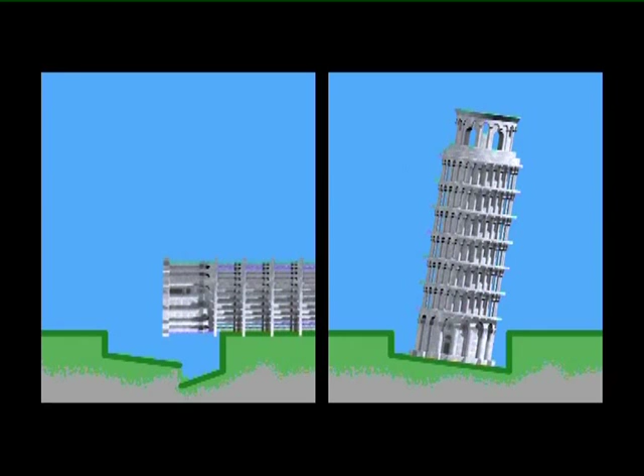The experts immediately realized that the tower was in serious risk of collapsing, partly as a result of the nature of the ground on which it rests, composed of marine and river sediment and therefore highly deformable, and also because of the stress it was subjected to by the lean itself. In addition, even though it was a situation of maximum alert, attention also had to focus on the severe deterioration of the stone surfaces.

By analysing the structure of the tower, the experts discovered there was a very serious risk of breakage at the first level, at the height of the first order of columns, the area most greatly stressed by the lean. The probability of collapse was extremely high, and so it was necessary to act immediately by taking urgent preventive measures. Therefore, an encircling support structure was created to run all the way round the first order.

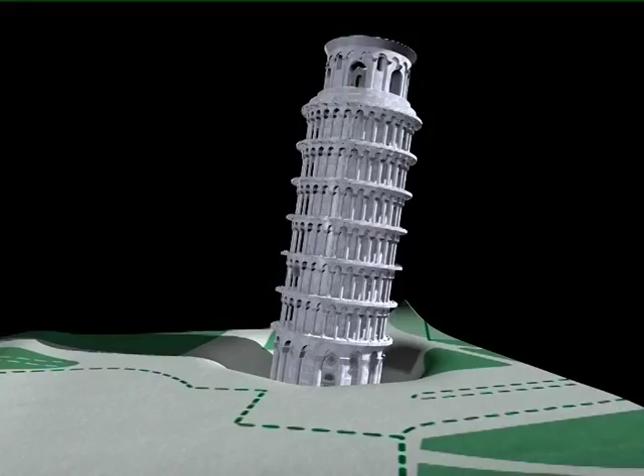Several steel cables with a 15mm diameter, insulated by a special sheath in order to protect the marble, were positioned around the first order, so as to counteract the widening of the cracks and ensure that the masonry remained compact. At the same time, the committee undertook temporary works aiming to prevent the lean from continuing to increase. So in 1993, a series of weights were applied north of the monument to counterbalance the lean.

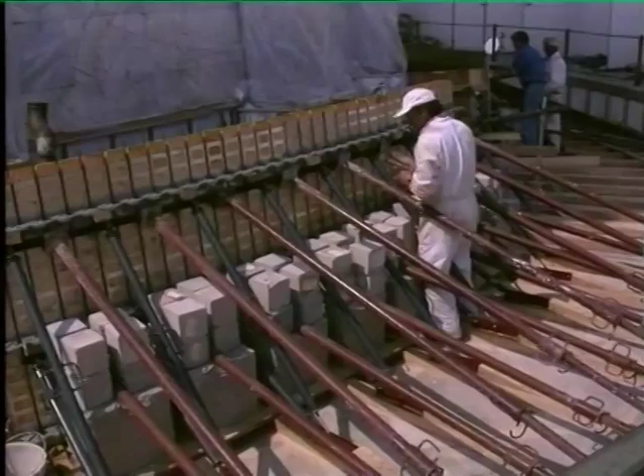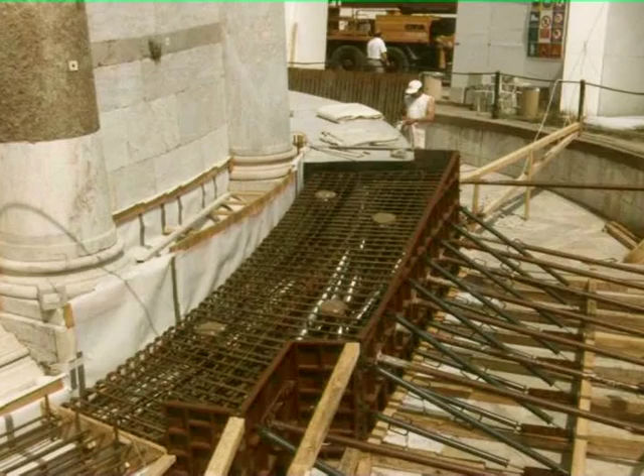On the northern part of the basin, a circular beam was constructed to support the weights. The girder, made of pre-stressed reinforced concrete, was carefully separated from the marble walls of the tower by means of several layers of insulating material. Work on setting the girder and the supports in place was carried out between July 1993 and February 1994.

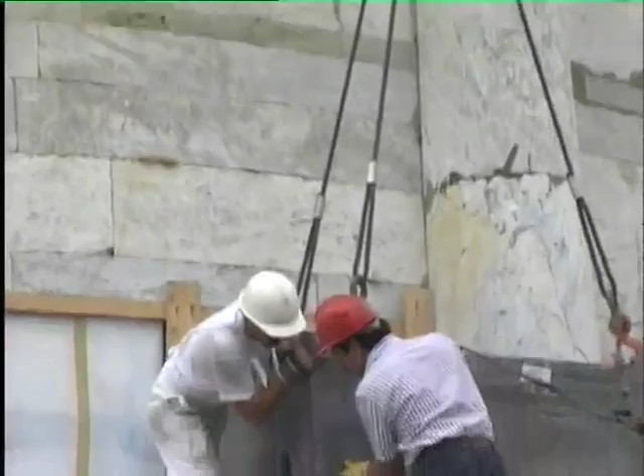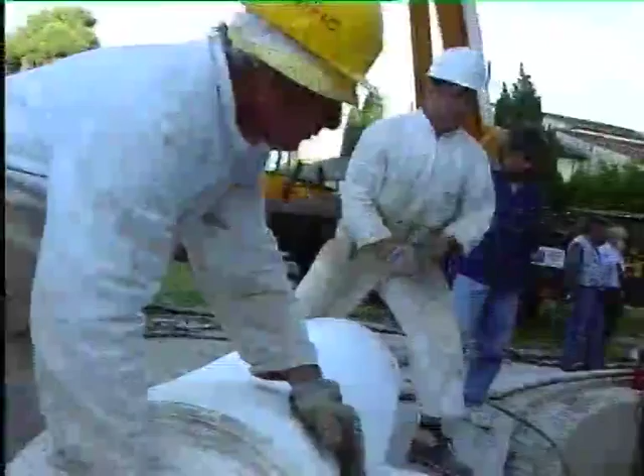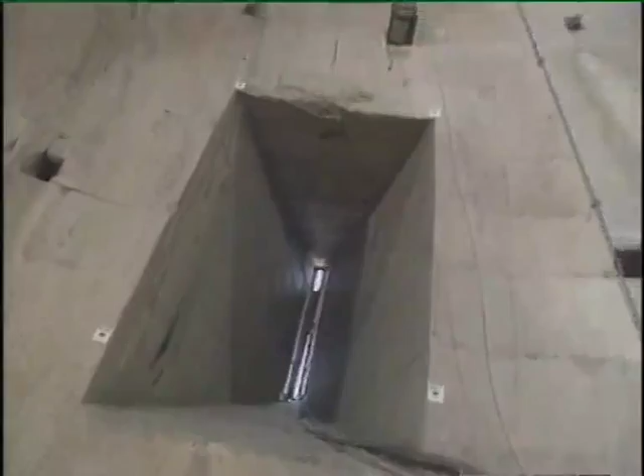60 ingots of lead, each weighing 10 tons, were positioned along the circular girder at suitable intervals of time. To ensure the tower would not come into direct contact with the weights, its surface was protected with a layer of rubbery material that was placed over Teflon sheeting. These measures guaranteed that the tower became temporarily safe so that further studies could be performed without any imminent danger.

A complex monitoring system was installed, capable of logging up to 220 different signals every 5 minutes. Meanwhile, dozens of experiments were performed to analyse the behaviour of the tower in the main risk conditions. For example, to test its wind resistance, a model on a 1 to 200 scale was built, composed of the bell tower and all the surrounding buildings, extending over a radius of 600 metres. The model was then tested in a special aerodynamic wind tunnel.

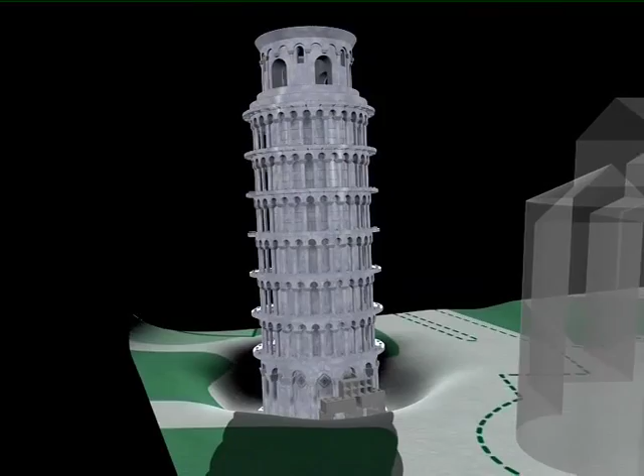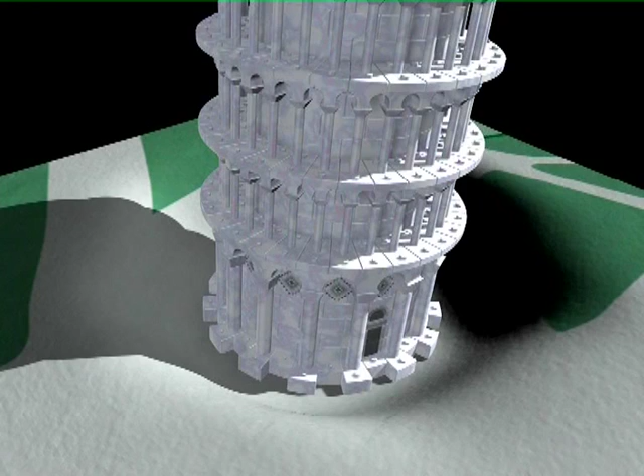Once the lead ingots were in place, scientists observed that for the very first time in its history, the tower's headlong tilt southwards actually stopped, and in fact its lean even decreased by 1 centimetre. The favourable outcome of this temporary work led the committee to design measures that would obtain the same beneficial effect as the counterweights, but would eliminate the unacceptable visual impact of the ingots piled up against the northern wall of the tower. The committee drew up plans to replace the load composed of lead ingots with a system of deep anchorage up to a depth of 45 metres.

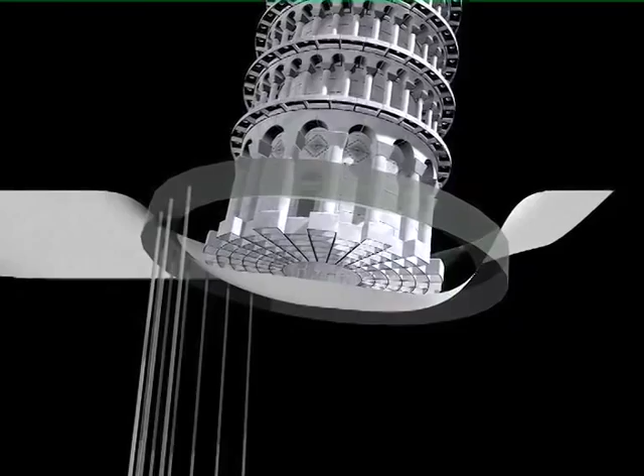The anchored weights were fixed to a buried reinforced concrete circular girder cast around the foundations of the building and forming a whole together with the foundations. No problems were encountered in setting up the girder on the northern side. But when the decision was taken to start work on the southern and eastern sides, the experts found themselves facing such a dire predicament that work had to be suspended immediately.

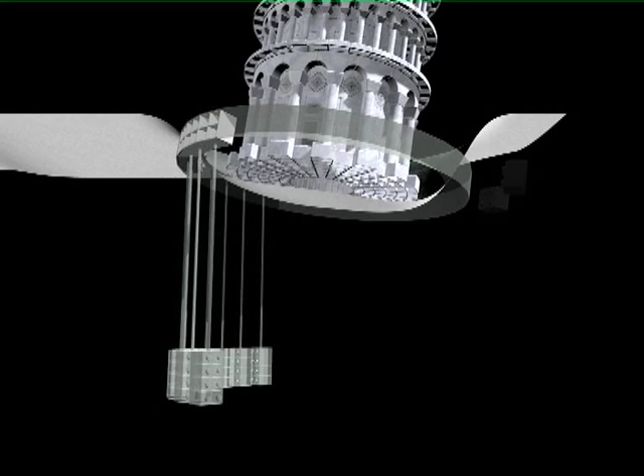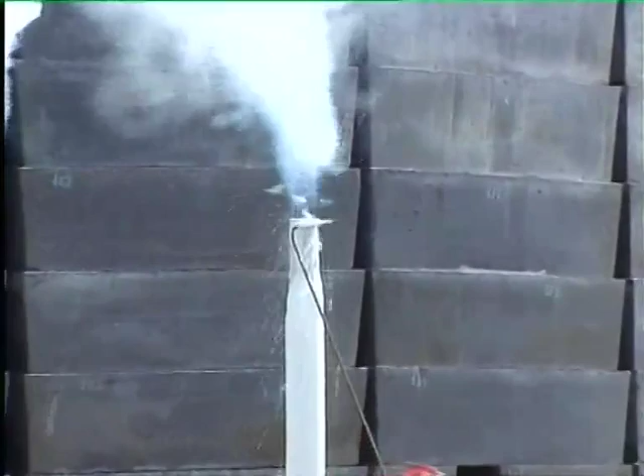What had happened was that in order to complete the installation of the ring-like girder on the southern side, in September 1995 it turned out to be necessary to freeze the ground by injection of liquid nitrogen. Suddenly, the situation became dramatic. The tower rebelled and began to tilt sharply. To avert the threat of imminent collapse, another 270 tons of lead had to be set in place to the north of the monument, and the anchoring project had to be abandoned.

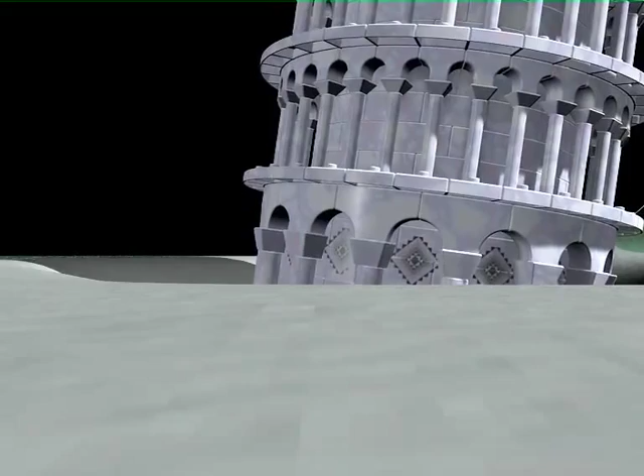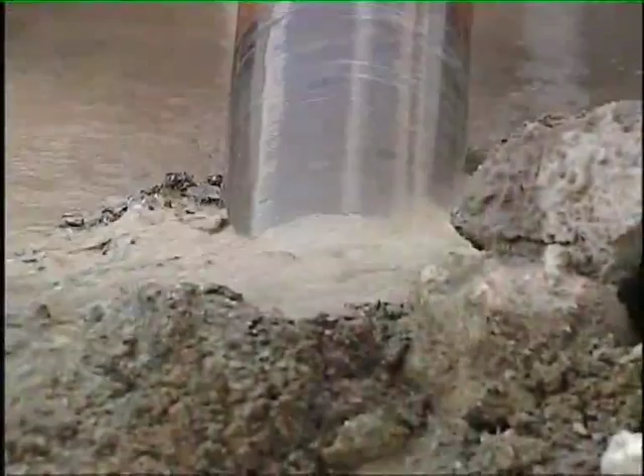After the danger had been forestalled, the committee drew up a new project which would prove a great success: the controlled removal of soil. The idea was that by extracting small quantities of earth, the soil would settle slightly so that the tower would be induced to incline just a little towards the northern side, counterbalancing the lean towards the south.

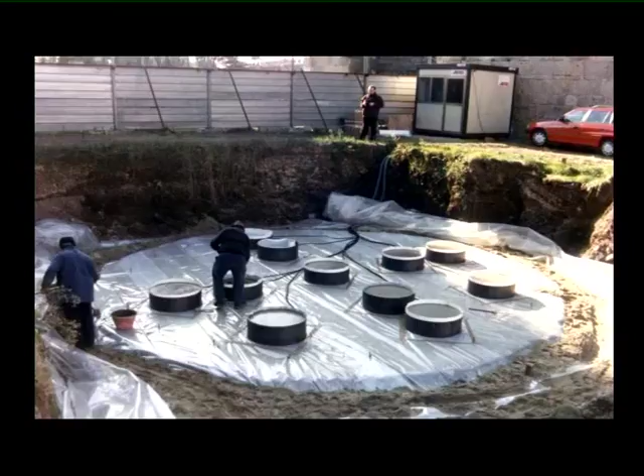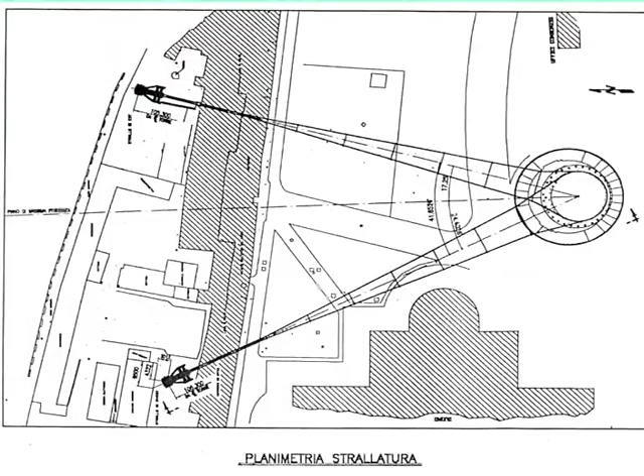Before proceeding to soil excavation, the scientists decided to embark on a large-scale test a few dozen meters away from the tower. They also undertook the creation of a guy wire, in other words a sort of lasso wrapped around the tower, ready to support it at the first warning signs.

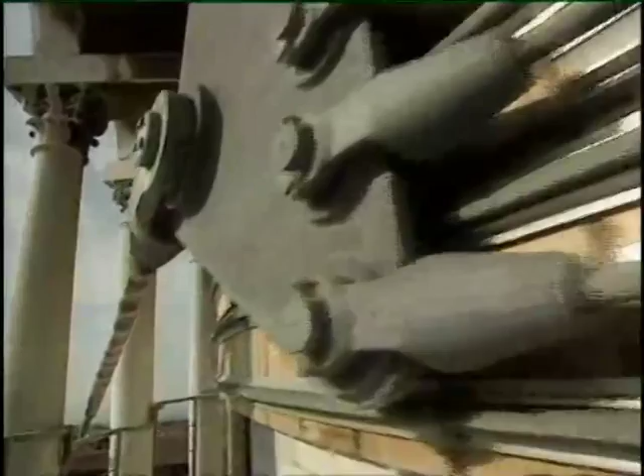In 1998, once the test had given positive results, two roughly 100-metre steel guy wires were constructed, connected to two anchoring structures that would be able to tighten the cables and ensure they were kept taut. Ready to spring into action at lightning speed in any emergency, the system of steel stays never had to be brought into use.

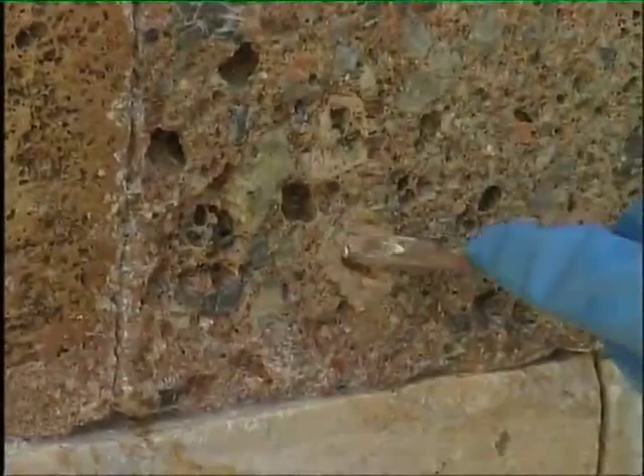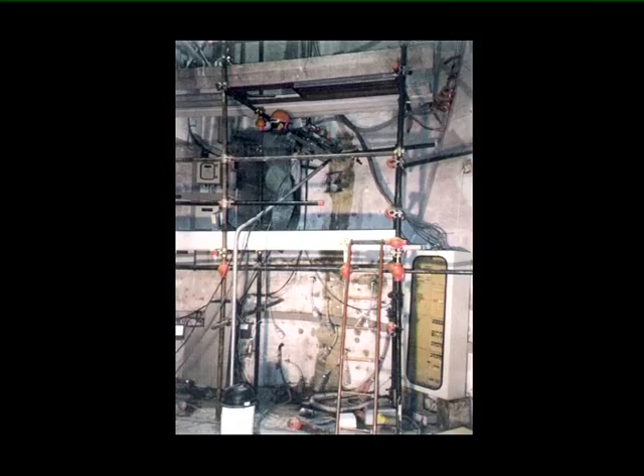Between 1998 and 1999, the masonry was consolidated in the critical areas through injection of a specially created mortar, chemically compatible with the original materials, and insertion of slender stainless steel bars. The first excavation work started. 12 drills were utilised, and over a period of 6 months they removed about 7 cubic metres of earth, slightly decreasing the inclination.

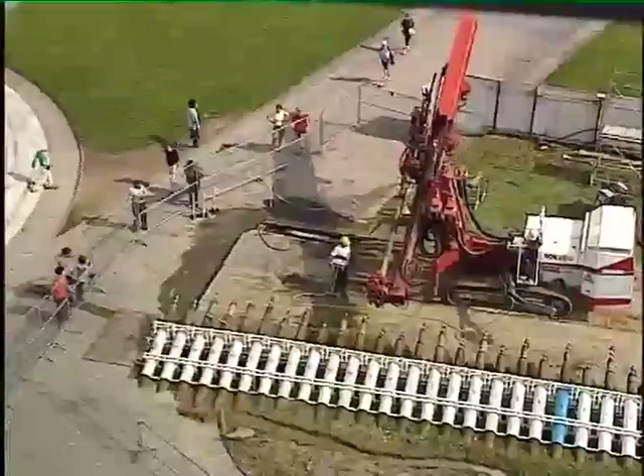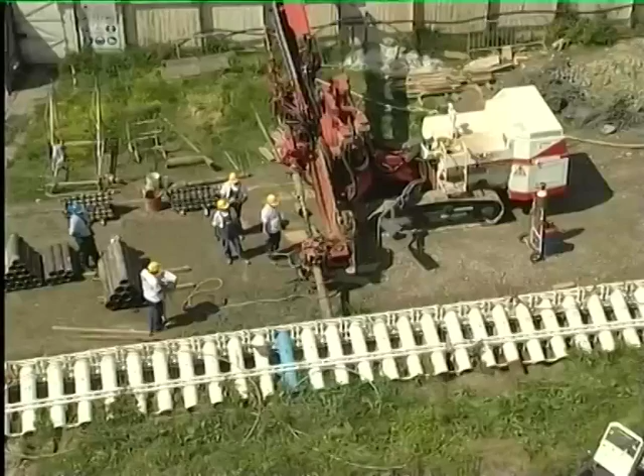Given the excellent results, work continued with the definitive excavation. 41 drills gradually removed 38 cubic metres of earth. Meanwhile, the lead weights were taken away, as they had by now fulfilled their stabilising function. The ring around the bottom of the base was removed. The drills were dismantled. The guy wires were disassembled.

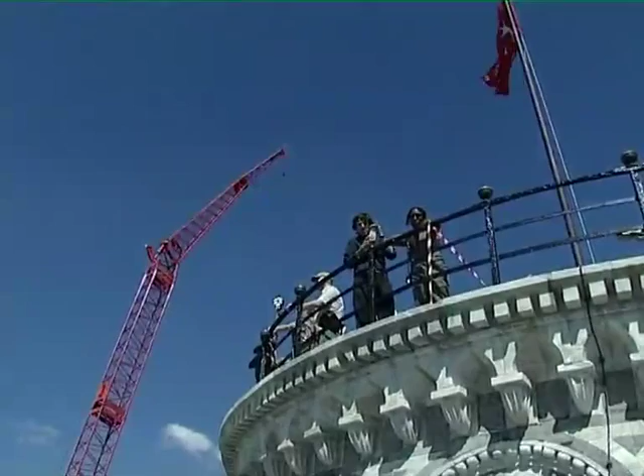And finally the tower, as if it had turned the clock back by 2 centuries, had recovered that vital half a degree considered crucial for long-lasting stability. And now it could be open to the public again. It was the year 2001. The leaning tower has been saved while hardly having been touched. But the tower still has a long way to go to complete recovery. Now that the tower is once more out of danger, the next step to be undertaken is restoration of the surfaces.